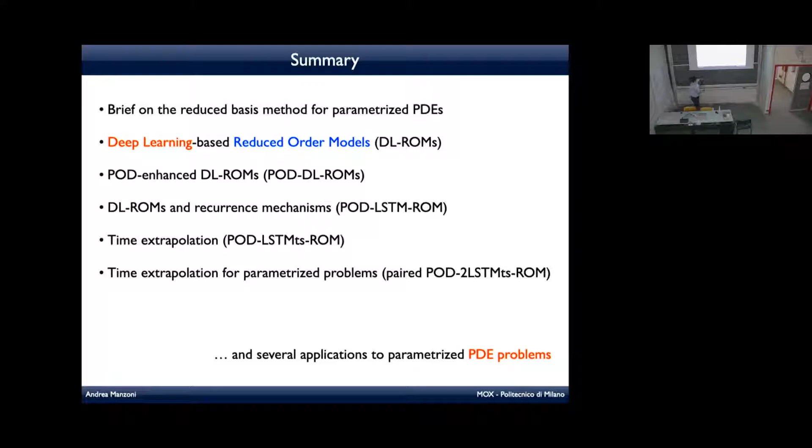Before starting, some acknowledgements to the main drivers of what I'm going to talk about. Stefania, who got her PhD at MOX, and then she's working with me during her postdoc. Nicola, currently PhD student. Federico has just finished his master project. Giorgio has just finished his PhD at the Civil Engineering Department. Stefano is a researcher at MOX in numerical analysis, and then more senior people here. Some of you, I guess, know already. Luca, associate professor, and Paolo, full professor. Attilio is full professor of Scienza delle Costruzioni, so mechanical engineering, and then Alfio.

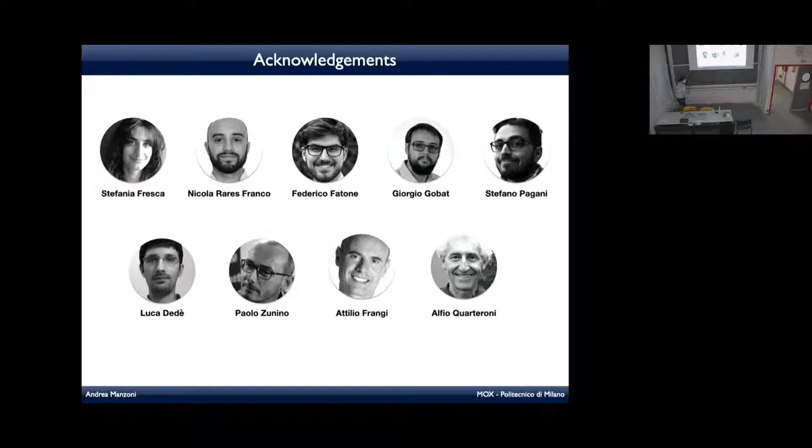Part of this activity was also related to an ongoing project within the framework of the iHEART ERC project coordinated by Alfio Quarteroni at MOX. Now, if you go clockwise, this is a bit the trip we had in the past couple of years. We started by considering cardiac electrophysiology. We moved to structural mechanics, macro, I would say, and then we moved to micro electromechanical systems, and then we approached fluids. I don't have time to go into details about all these applications.

I would like just to tell you the way we have approached these kinds of problems by realizing that previous techniques like reduced basis methods were not sufficiently efficient in order to reach real-time solution. We want to solve these problems many times because there are parameters that affect those problems. We want to solve them many times because, for instance, in the first case, some electrical conductivities are related with the patient, and then the behavior of the electrical potential on the ventricle can be

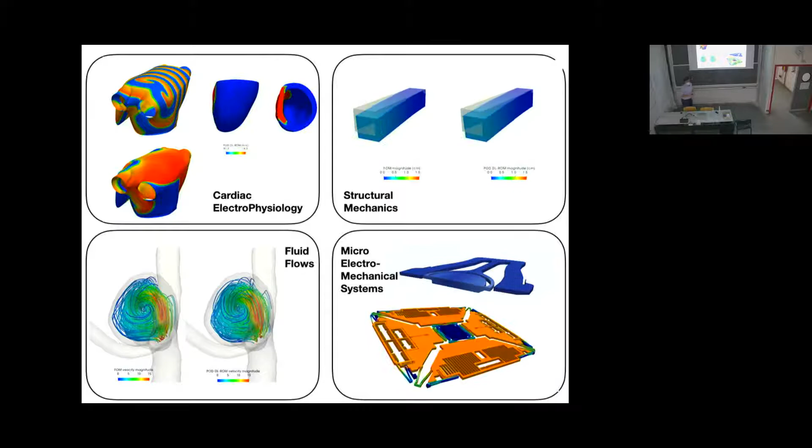affected by those parameters. We want to, for instance, consider the flow through an aneurysm regarding the impact of the Reynolds number on the vortex pattern that develops within the aneurysm, and so on. So we want to solve problems many times. These are multi-query problems. On top of this, there are other problems of great interest: uncertainty quantification problems, inverse problems, optimal control problems.

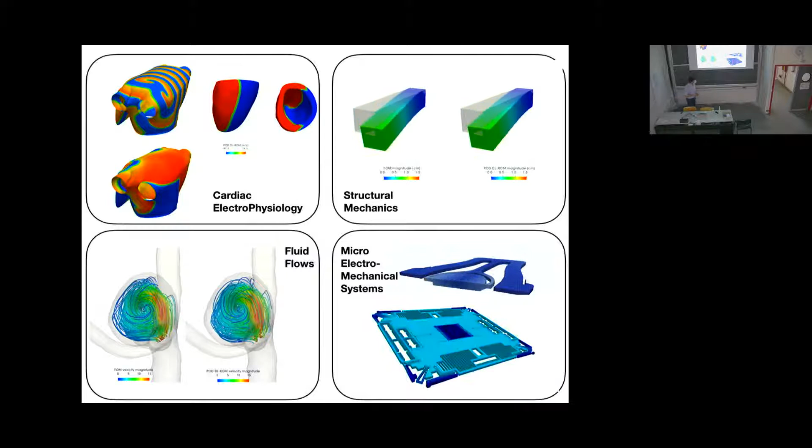So as soon as you need to solve a PDE many times, either because of inputs that vary, or because you are interested in addressing real-time computations, then sooner or later you realize that traditional high-fidelity full-order models like the finite element method are not rapid enough.

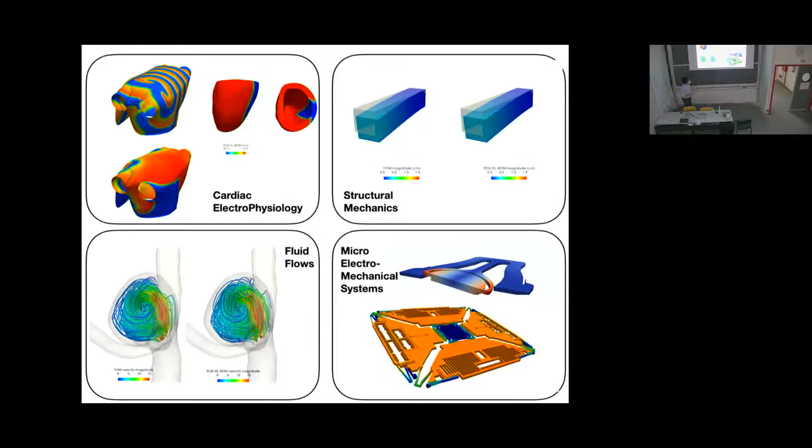There's plenty of contributions within this area. So depending on whether you consider physics-based strategies or more data-driven techniques, I guess you are already familiar with some of the words that appear on the slides. You can rely on purely data-driven machine learning emulators or physics-informed neural networks, or, on the left part, more physics-based approaches like the reduced basis method, and then something in between.

Since we started with the ideas stemming from the reduced basis methods, but we also relied on neural networks, I decided to sketch these sort of slides. Then depending on the way you train your model, you can of course reach different alternatives.

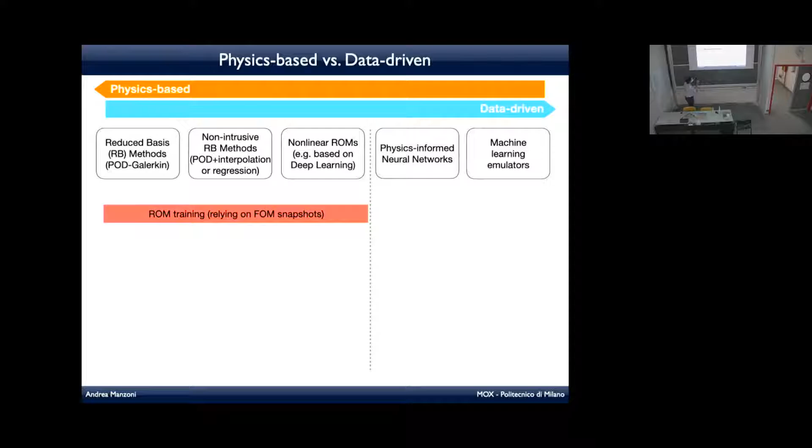In all these cases, if you consider more traditional strategies, and I'm going to spend a few minutes on this, we need to train the reduced order model by using some snapshots, that is to say, some solutions that I need to compute by relying on the full order model, the FOM. So I cannot replace the finite element approximation. I build something upon it. Okay? So I still rely on the full order model to generate data, either to train a traditional linear reduced order model or a nonlinear ROM based, for instance, on deep learning.

Either I rely on low-dimensional linear subspaces, then I fall onto the more traditional reduced basis methods, or, as in the case I'm going to address, we want to rely on nonlinear reduced manifolds. We want to compress, to reduce the dimensionality of our data that stem from the numerical approximation of PDEs by using deep learning.

And then, depending on what you would like to do during the testing stage, so each time you have a new parameter value and you want to solve the PDE once more, either you build a reduced system in the reduced coordinates that is linear or nonlinear, depending on the problem you started from, or you evaluate a neural network-based map that has been trained. In this way, we can reach very fast computational time during the testing stage.

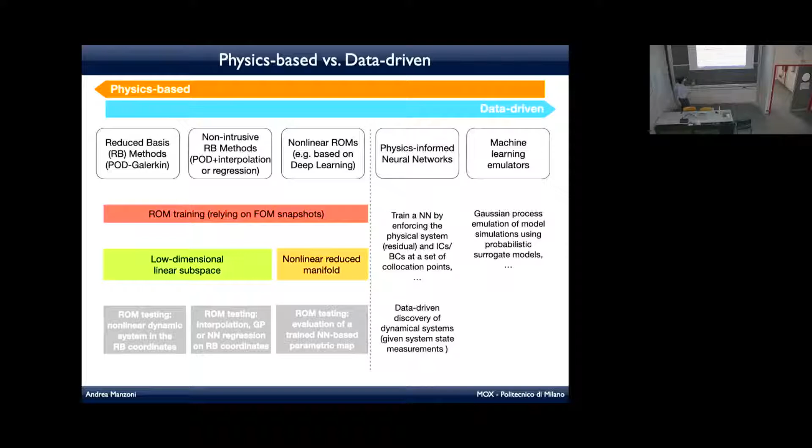Or you can do several other things. You can rely on Gaussian processes, or use neural networks to enforce the equations of the problem, and so on. So we will focus on the left part, and in particular, a sort of intro to the basic strategies that we started from in order to then approach nonlinear reduced order models.

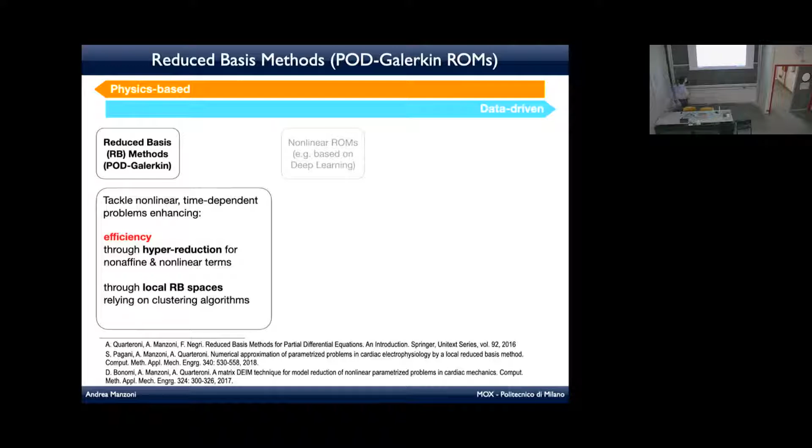So the very first set of slides is devoted to the reduced basis method, in particular relying on the proper orthogonal decomposition, POD, something that can be called either singular value decomposition or principal component analysis, or Karhunen-Loève expansion if you are more related with stochastic problems. We need to enhance efficiency in this case. In reality, some machine learning strategies already appear here because we rely on clustering algorithms to be able to perform a local reduction.

A linear problem to warm up. Sooner or later, if you rely on finite elements or finite volumes and you have a linear, stationary partial differential equation, you end up with a linear system to solve. N_h is the dimension of the linear system. N_h can be very large, depending on the discretization you have chosen. And this is the most basic version of the problem we need to solve.

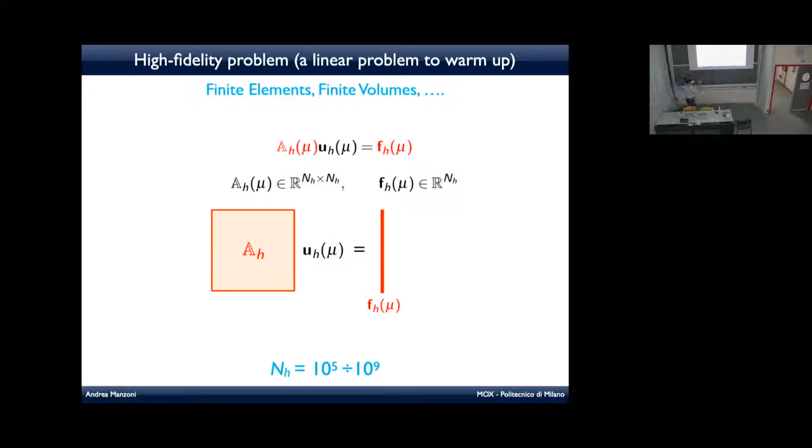For any mu values, where mu is a vector of parameters, a finite dimensional set of parameters that can affect either the matrix at the left-hand side or the source term, the boundary conditions, whatever, you have to face the solution of a linear system like this one. The idea of the reduced basis method is essentially to sample the solution manifold.

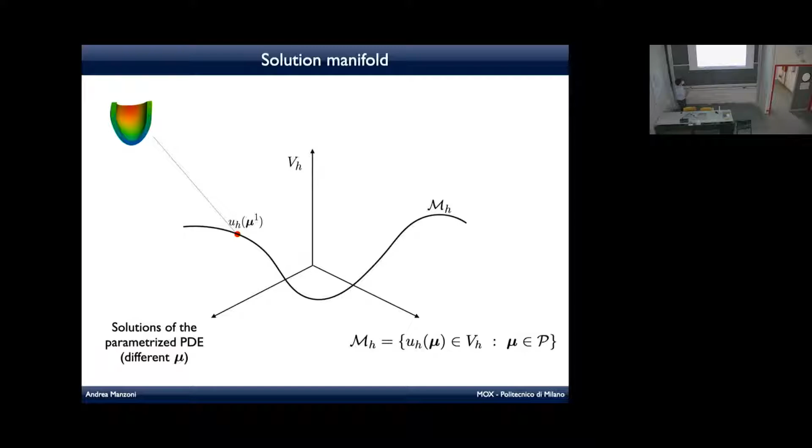Within the finite dimensional space V_h in which we seek the solution of the full order model, a finite element space for instance, the parametric dependence induces a structure on the solution set. So instead of looking for a set within this space, you might think that the parametric dependence yields a better structure to the solution set, the solution manifold. If the parameter is one-dimensional, you have this sort of filament in the space. Each point here is the solution of a problem.

So the idea of the reduced basis method, which in part is also inherited by the deep learning-based ROMs, is to sample offline this manifold. This means that for each parameter value sampled on the manifold, I compute the solution by using the full order model. So finite element computations are still behind this picture. And this is the offline, the training stage, okay? Even before considering neural networks.

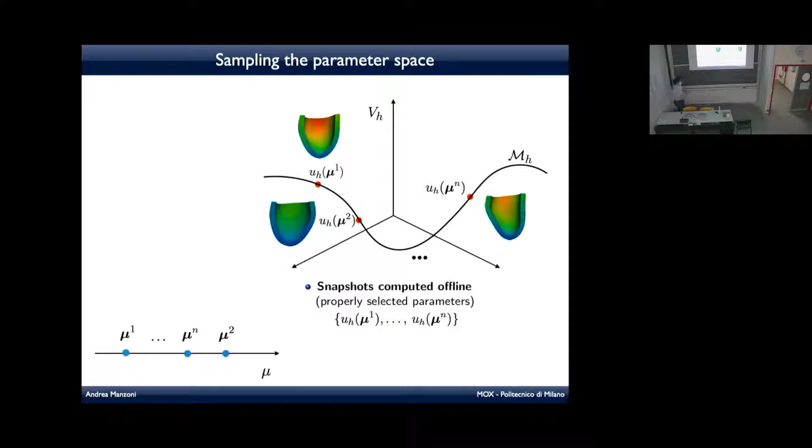Then, the interesting part is what happens if a new parameter value mu, different from the ones that I have visited offline, comes, and I want to solve the problem for the new mu. What happens?

Well, instead of looking for an approximation on the black manifold, I'm going to look for the solution on the red manifold that lies on the hyperplane in blue, that is spanned by a set of small n, that will be large N in the following slide. The red manifold lies in this low-dimensional space. This is the case in which you have a linear low-dimensional subspace with a dimension that is hopefully very small.

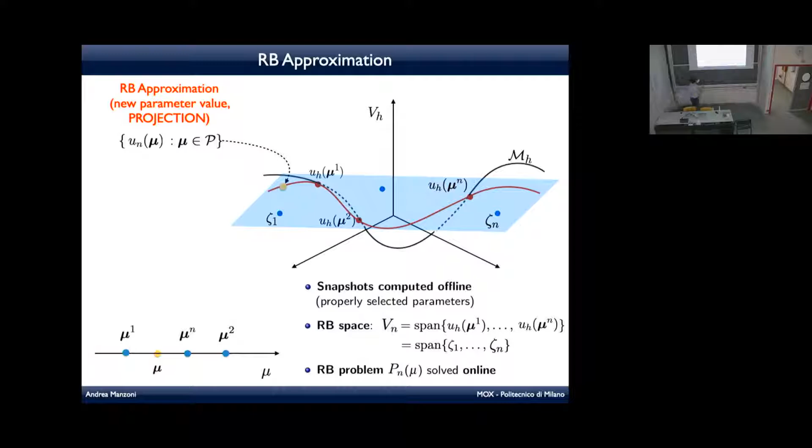NH was the dimension of the previous discretization, the full order model. I hope that this dimension n is much smaller than NH. Otherwise I cannot hope for a good speed up. And then I need to enforce a set of n constraints. I have a linear combination of n basis functions. I need to enforce n equations. And this is the idea.

So I'm looking for an approximation. Sorry if I am a totally discrete guy in the sense that everything has been already discretized. So I find much more intuitive to look at the algebraic counterpart of all the formulations, to be faster also, and I hope simpler. So the original finite element solution is approximated by a linear combination of a set of basis functions. V is a matrix that allows me to change the basis between the full order and the reduced order space. And now I need to find n components.

This will be the vector. So instead of looking for a vector that lives in R to the power NH, now I'm looking for a vector that lives in R to the power n. Okay? How to do that? Well, I can enforce that the residual of the equation, what I get if I replace the original solution with the approximation, is orthogonal to the n columns that span the low-dimensional subspace. I need n constraints. I have n basis functions. This is a possible way. This is nothing but a Galerkin projection.

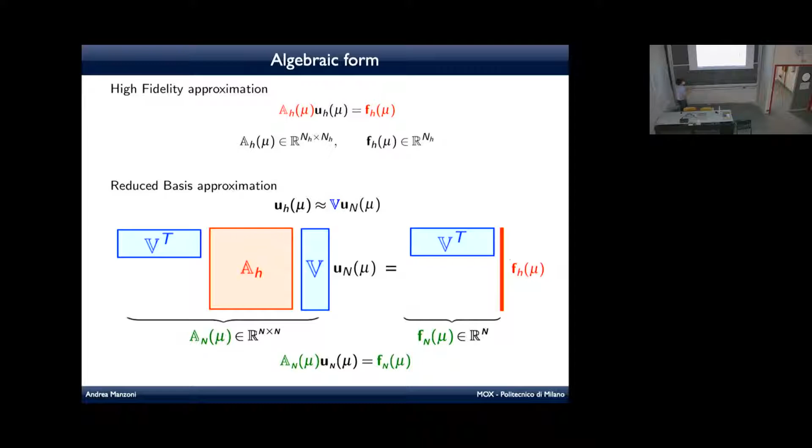And this brings me to a system that is much similar to the original one. The difference is that now the dimension n is much smaller than NH, because n is the number of the basis functions I have. This is the way I can get the new matrix and the new vector. The point is that I don't want to assemble this matrix in this way, because this would still entail the need to perform NH-dimensional computations. But if NH is 1 million, I don't want, for any mu value online, to deal with a 1 million by 1 million matrix vector product. Okay, so I need to be even more clever in order to assemble it. But this is, in 3 slides, the philosophy, the idea of the reduced basis method.

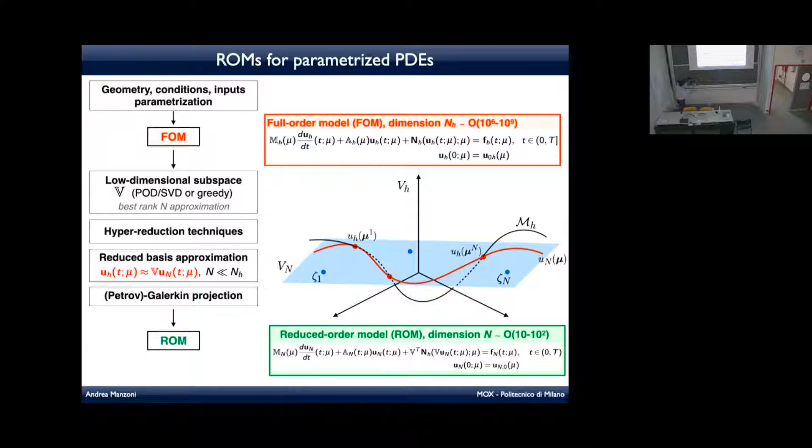Okay, and then this is the assumption we have made before. The solution is the linear combination of a set of basis functions, also if the problem is time dependent, and then a projection approach allows me to get a ROM. Also in the unsteady nonlinear case, the ROM looks very similar to the FOM. The structure is the same. All those matrices, Mn, An, are obtainable by that matrix product as before. And this nonlinear term deserves a bit more careful treatment. If you are interested in this, I can give you pointers and details.

What happens for a problem in cardiac electrophysiology? Well, this is a problem in which an unsteady reaction-diffusion partial differential equation has to be solved. This is a portion of the tissue. This is a very idealized case. And here there are three parameters. This is the so-called pinwheel experiment. Because you have a planar wave excitation of the tissue, the propagation of these fronts is typical of this kind of nonlinear reaction mechanism. And then you have a second stimulus. Depending on the way this second stimulus is given, you can play with three parameters: the time interval between the two stimuli, the radius of the region that you are going to stimulate, or the properties of the tissue. Well, the behavior can be completely different.

Okay, you may think that for each vector of parameters in this space in 3 dimensions, you can jump on the different solutions. What I want to do is to observe some of these solutions for selected parameter values during the training stage, compute the solution, put everything into a matrix, compute the SVD of that matrix, and then produce a basis.

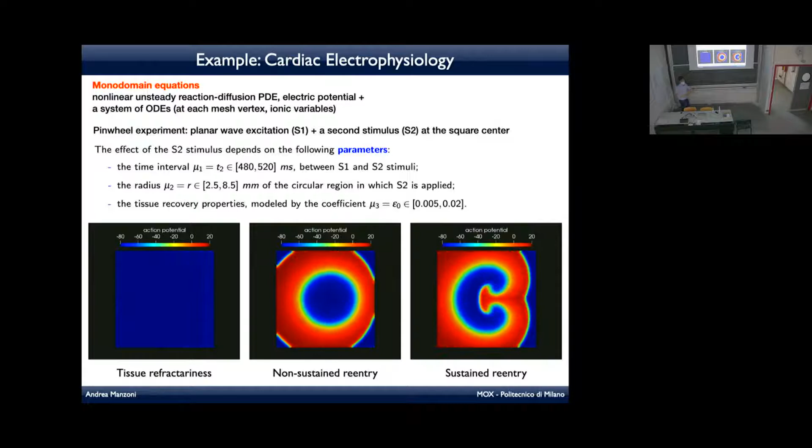This is the basis that I'm going to use instead of the typical finite element basis to generate all the new solutions for the unseen parameter values. Okay, which is the problem? Well, the reduced basis method works, but the point is that the singular value decay is very slow. This means that if I want to reach some precision, and the error that I get, at least on the training data, is related to the singular values that I discard, if I want to get sufficient accuracy, the dimension of the reduced basis space can be very large.

This means that 600 bases are needed if I want to get a sufficiently good reduced order model. These are solutions with a ROM sufficiently fine with respect to the FOM. The point is that the reduced basis dimension can be very large, not only because of the need of generating solutions as linear combination, but also on the right-hand side for the sake of hyperreduction. Somehow I need to linearize the nonlinear operator as well if I want to be efficient in their assembling. And also in this case, many terms are needed if I want to be sufficiently accurate in the interpolation of those terms.

So the method works even if I am using local reduced basis. I cluster the snapshots into 6 clusters, and this allows me to decrease a bit. Instead of taking 600, I have 200 basis functions, but this is still too much. Because this means that for any new problem, I need to solve a dynamical system of dimension 200. And at each step, I need to perform operations that are still related with a dimension that is order of 10 to the power 3 because of the assembling of the reduced operators. And this is too much. I'm not able to be real time.

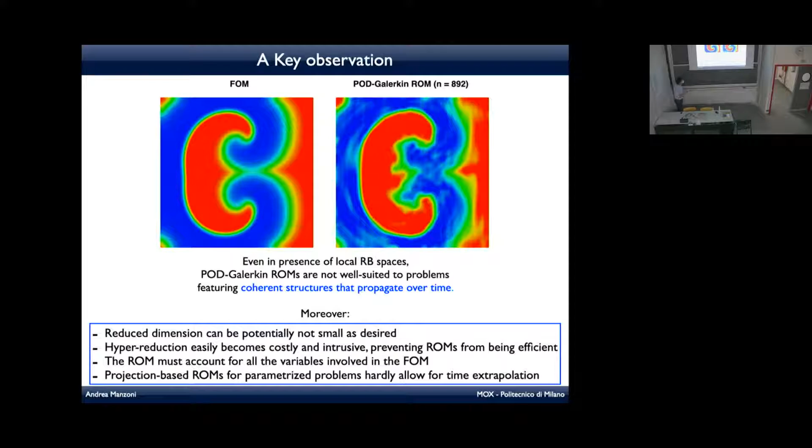These are some limitations, and these are the motivations, at least the first three, that motivated us to find alternative ways, and in particular deep learning based ROMs. The idea now is to solve still parameterized problems, enhancing efficiency by using deep learning algorithms that are trained on a set of full order model solutions.

So this means that some of the ideas that we had before are still valid. In particular, we still rely on data coming from the full order model. We still need to solve the full order model for selected parameter values to collect data. But the way we handle those data is completely different. I'm no longer interested in finding a good matrix to represent the change of basis. I'm more interested in looking for a nonlinear map that allows me to reduce dimensionality. Okay.

So in a couple of slides. Before, what we were looking for was a linear transformation from the full order model world, the finite element approximation, into the reduced one. So small n, which is the small dimension in which we were solving the problem before, was obtained by assuming the solution in the POD case, the proper orthogonal decomposition. For this reason I call it a linear ROM, because this is a linear transformation.

This is a matrix. The trial manifold, the set of all possible solutions for different times and different parameters, was generated once I had an idea of how those reduced coordinates evolve in time. So you have n degrees of freedom, and we had a map that was linear. The map that from the reduced world allowed me to reconstruct the full order solution was linear, a matrix vector product.

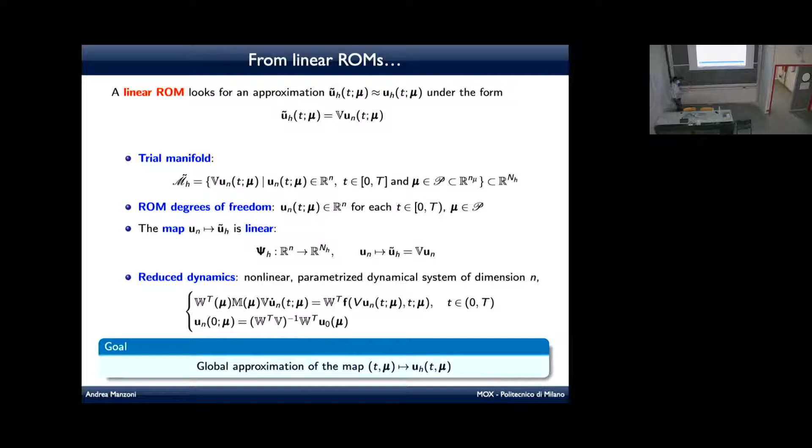What happens in nonlinear ROMs? Well, I have some maps. Then in a couple of slides, I try to make this, I hope, much clearer and built step by step. So now I have a map that allows me to obtain the full order solution coming from the reduced one. This is no longer a matrix. Before here I had a matrix. Okay, this is a nonlinear map.

Once I have the reduced degrees of freedom, then by applying this map to the reduced degrees of freedom, I get what is the trial manifold. So the set of all possible solutions for parameter values and times. Okay, so I have a set of small n reduced order degrees of freedom and another map to learn. This is a nonlinear map, no longer a matrix.

I need to learn this map, but I have two maps because I cannot rely yet on that projection process. So I need a second parameter dependent map to be learned. That is what happens for the reduced degrees of freedom. Okay, I need to compress information. I need to find a suitable space of latent variables in which to solve the new problem. Okay, how to do that?

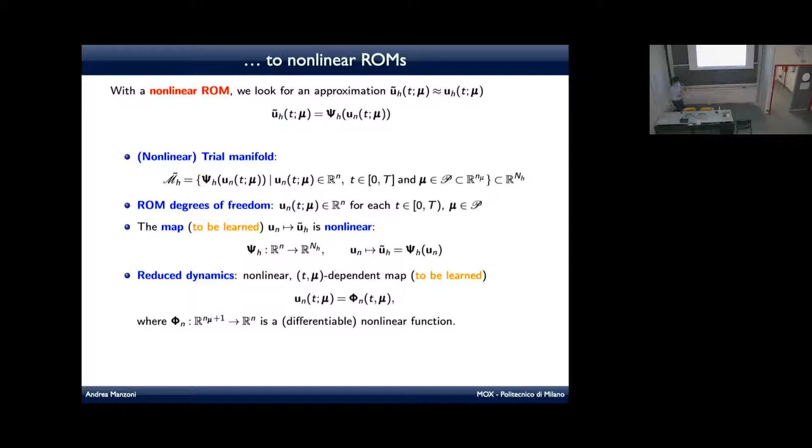Remember that I want to solve a problem for any new parameter value. So I need a second map that for parameters and time allows me to get a suitable approximation of the low dimensional representation. So by training this autoencoder, at the very end, for the testing stage, I will discard the encoder, and I will compose a feed-forward neural network that allows me to learn the map from the parameters to this latent representation, composed with the decoder, to get an approximation UH tilde of the initial solution.

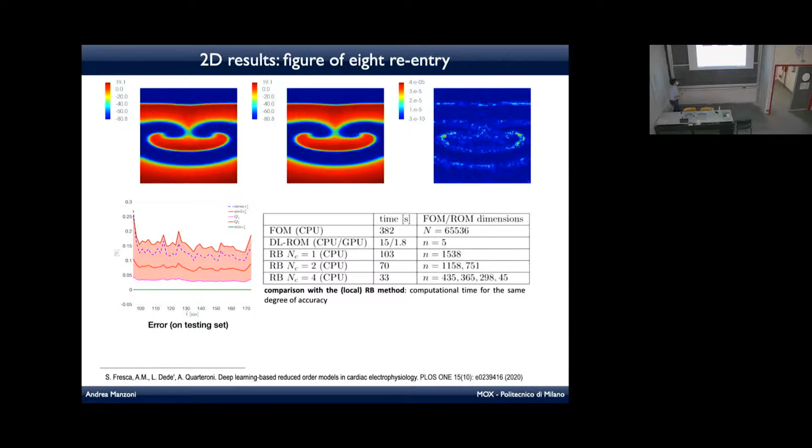So I guess that some questions start to arise. The first question is how to choose the reduced dimension n, that is, the amount of latent coordinates that we use in the case of a DL-ROM. And then many other questions: how to design the architectures, how can I expect the error to decay, and so on. I don't have time to address all those questions, but at least I have inserted 3 slides trying to address this question, also knowing the interest that some of you have in this field.

We move to the steady case, and we move to the case in which we have an autoencoder, so psi prime and psi, the encoder and the decoder, and phi now is the parameter to latent representation map. So the reduced order model is the composition of these two maps, the blue one and the green one. The encoder will be discarded.

And what we have shown, at least for linear elliptic PDEs with a certain degree of regularity in the parameter to solution map, is that we can somehow bound this dimension, the minimum dimension n min, as a function of the number of parameters. So P is the dimension of the parameter vector that was of finite dimension before.

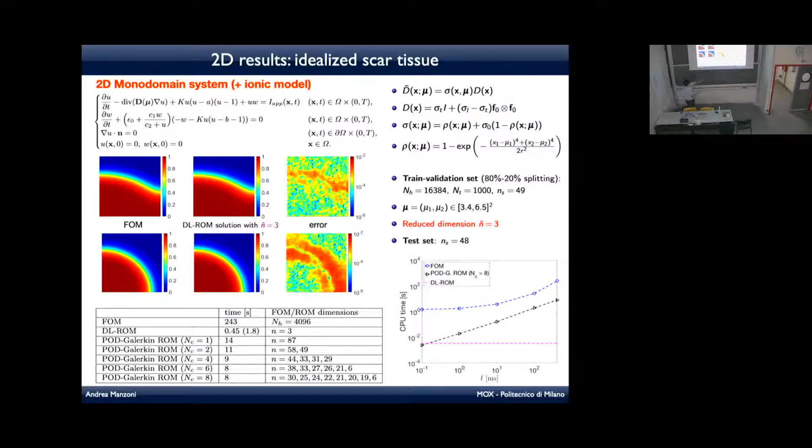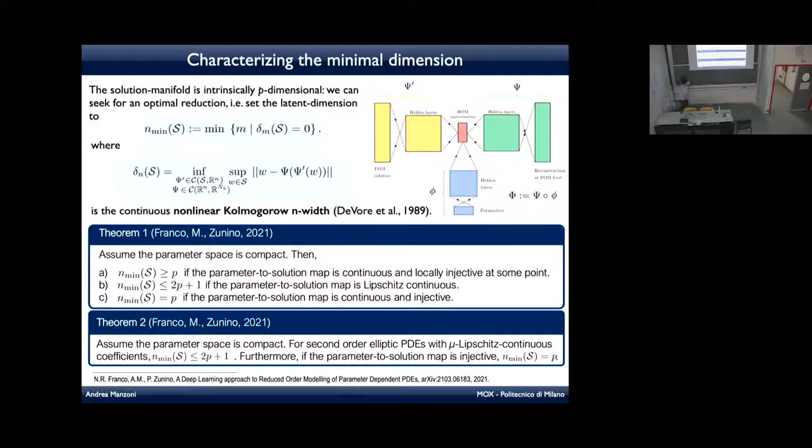At the beginning, a couple of years ago, we could not rely on rigorous results. Later came the analysis on this, for the time being, stationary version. If the parameter space is compact and you are facing second order elliptic PDEs and the coefficients in the PDEs are at least mu-Lipschitz, well, 2P plus 1 is the maximum that you can play with. And if, moreover, you have a parameter to solution map that is injective, well, P is the dimension to play with. And if you're interested in the details, we have an arXiv preprint for a paper that is currently under review on this.

There's something more. Can we bound the error? So the approximation error that is committed by this deep learning-based ROM over the parameter space, I can consider it as the supremum of the solution minus the reduced order solution. I can bound this by putting together 2 different contributions. This is a sort of reconstruction error.

U mu is the ground truth solution. This is the only action of the autoencoder, psi prime and psi were the encoder and the decoder, plus the parametric error. This is the error between the output of the small phi map and the encoded version of the solution. And surprisingly, the linear Kolmogorov n-width comes into play again.

We can bound the model complexity, somehow, how many weights and how many layers we need for the 2 networks, in terms of the accuracy epsilon that we want to reach on the global error. And M is somehow related to the minimum dimension that is required to have the linear Kolmogorov n-width. So this somehow shows a sort of reminiscence of what happened in the case of linear ROMs, in the case in which linear ROMs, say, proper orthogonal decomposition, were fine.

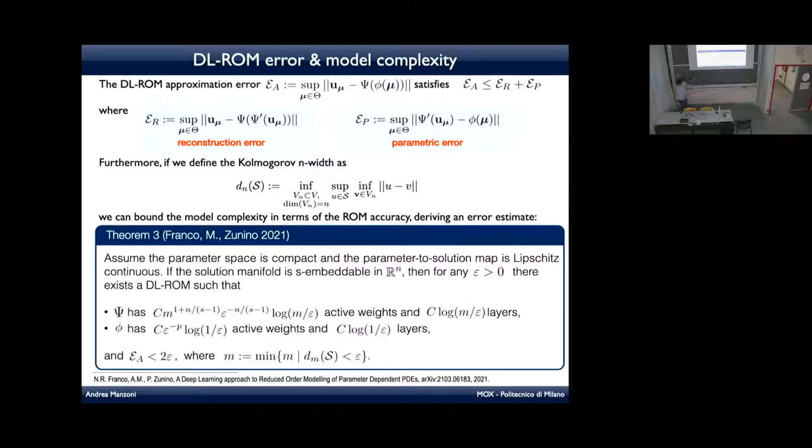Also here, we can hope for a very good reduction. So problems for which linear ROMs were causing much more trouble will somehow reflect also in the complexity of the networks. If you're interested in the proofs and further details, everything will very soon be added to arXiv, because this is part of the revision process of this work.

Comments. So this M, the minimum value for which the linear Kolmogorov n-width is smaller than epsilon, can be thought of as an equivalent linear dimension. So this accuracy is roughly equivalent to the optimal one that can be achieved via projections. Okay, so M can be thought of as the number of modes in the previous reduced basis approach.

Okay, M does not affect the latent dimension. The latent dimension is related to P, the number of parameters. M has an impact on the complexity of the networks. Okay, and the slower this Kolmogorov width decays, the more degrees of freedom in the neural network architectures will be required, and the higher the number of the training snapshots.

And on the other hand, if the linear width decays mildly, somehow a mix of linear and nonlinear reduction might be an interesting choice. This was a conclusion that we saw theoretically. One year later, we already tried it practically. In the following slides, these are the results.

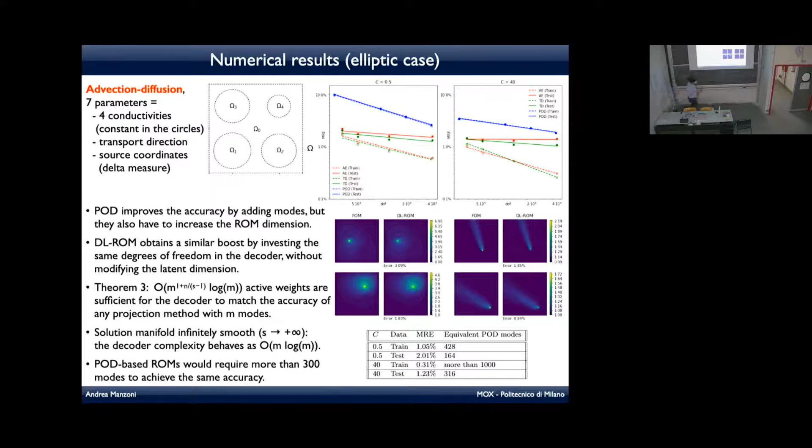This is an advection-diffusion problem with 7 parameters: 4 conductivities in those 4 regions, so constant conductivities in the circle, but parameterized; the transport direction, the angle; and the coordinates of a delta source that can move around the domain but not too close to the boundary. These are the 7 parameters.

And here you have, in terms of relative error, the comparison between the POD in blue and the training, the dotted line, and the testing errors with, for instance, this autoencoder idea in red. POD allows us to improve the accuracy, but of course requires more and more degrees of freedom if you think of the POD matrix that needs to be larger and larger.

On the other hand, these DL-ROMs allow us to obtain a similar boost by putting more degrees of freedom into the decoder, but without modifying the latent dimension. The good news is that we can still play with a very small dimension that in this case is equal to 7. So at the very end, 7 is the reduced dimension, and not 428 or 300 as in the POD case to reach the same accuracy.

Somehow, if you want to put together a few ideas on these DL-ROMs: the dimension of this DL-ROM, in particular regarding this latent representation, can be kept extremely small. At least for some classes of problems, we can show that this can be related to the number of parameters of the problem, the number of components in the parameter vector.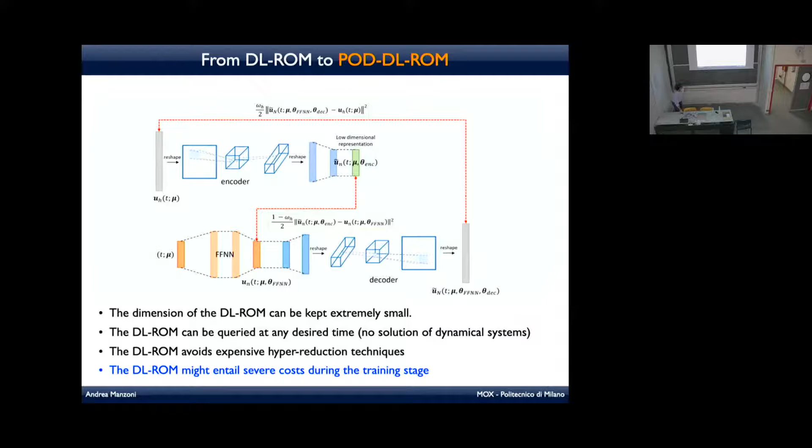Of course, I'm not going to cover all the slides because I'm going a bit slower. How much time do I still have? I don't. Okay.

So the idea is to move from DL-ROM to POD-DL-ROM, where POD is proper orthogonal decomposition. So POD-DL-ROMs add to DL-ROMs a first moderate dimensionality reduction based on POD. This means that from the original data I have, snapshots of the solution in time for parameter values, I will apply the idea of the convolutional autoencoder and of this feed-forward neural network to the projected version of this data.

So it's like the first layer of this convolutional autoencoder is already decided, and this is a linear dimensionality reduction. This means that at the very end, I will have a reconstruction error that is related to the projection of the data onto the POD space. And then as soon as I have recovered the approximation of this projection, by multiplying by the POD matrix, I will get the final solution.

So now I have another unknown: capital N is the dimension of the POD. This can be very large. The problem was that before, with the reduced basis methods, with the POD-Galerkin model, capital N was the only way to reduce the huge dimension N_h.

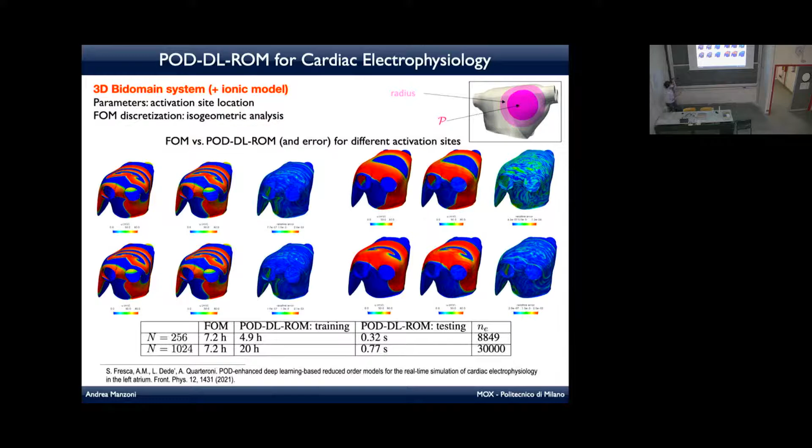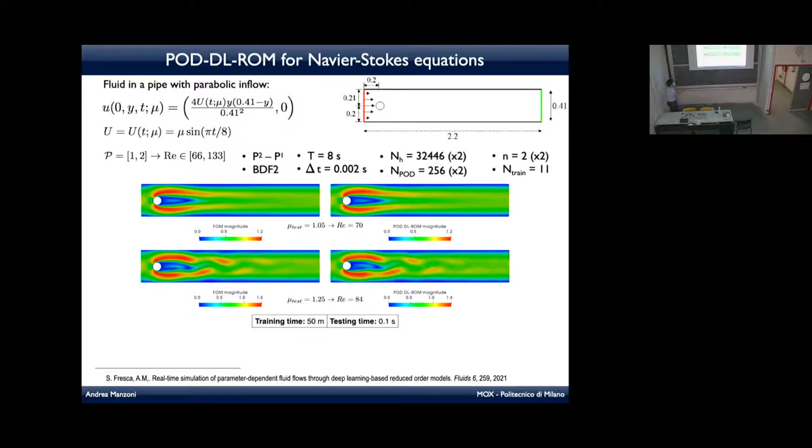Results from fluids: 0.1 seconds to get the solution for different Reynolds numbers in the typical flow past a cylinder benchmark, and also extended to velocity and pressure approximation. If you want also pressure, well, you can train networks that take into account also data coming from the new variable. So each variable can be approximated independently, because no physical constraints appear in the loss. This is a pro, but this could also be a con.

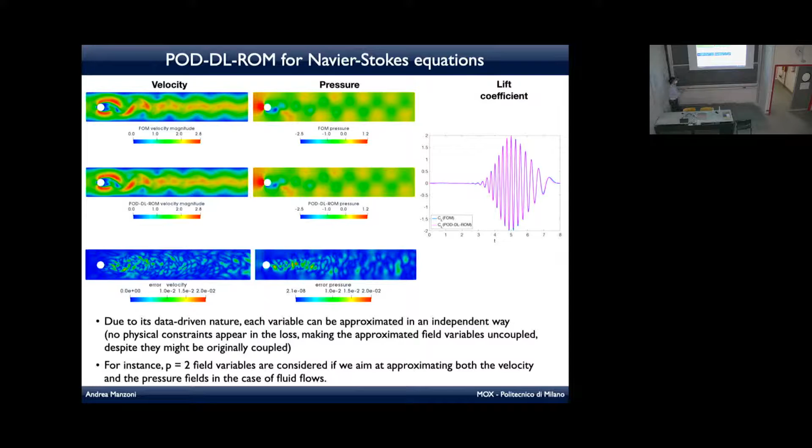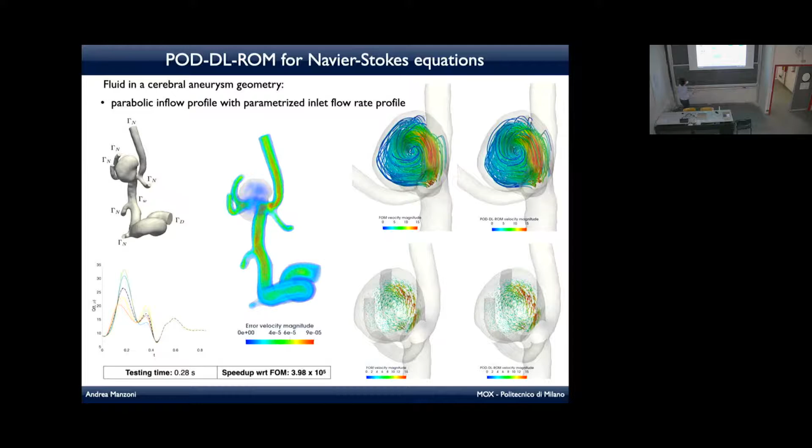All right, extension to fluid-structure interaction. There is also a paper on fluids if you're more interested in these applications. And then a few words regarding the way recurrency mechanisms can be added to POD DL-ROMs to take into account the temporal evolution. So for the time being, time was another parameter, not the time variable.

So adding structures that take into account recurrence mechanisms that resemble a time-marching numerical solver was the idea, to consider time as time, and in particular to try to advance the solution for larger times than the ones in which I observed the system during the training. So during testing, I want to solve the problem for new parameter values in the future with respect to the time horizon that I have seen during the training.

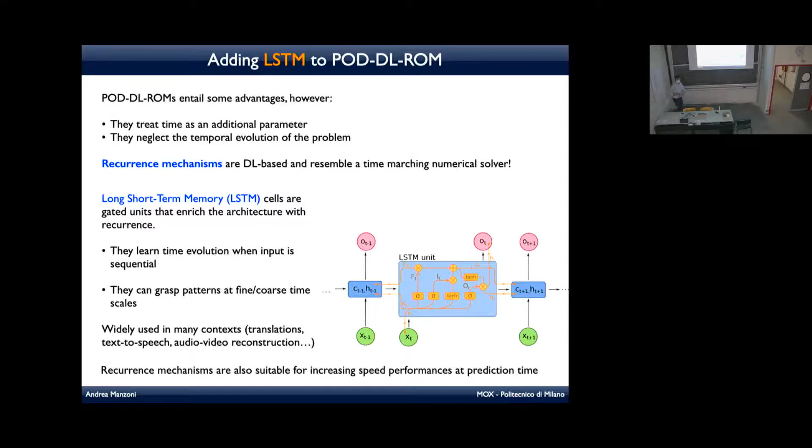This is the idea. The idea is to somehow replace layers with a sort of LSTM autoencoder to take into account a set of sequential inputs and provide a low-dimensional representation of the entire time sequence as a single vector. But this is just for parameters. And to treat time, I need to be a bit fast now.

I need to solve a sequence-to-sequence learning problem because I want to predict, to forecast the solution where I haven't computed the solution during the training for the snapshot evaluation. And another version, this T POD-LSTM-ROM, is the second architecture that is coupled to the previous one within a unique mu-T POD-LSTM-ROM that takes into account LSTM architectures.

I know I am very fast on this part, but if you are interested, there are contributions to a workshop at NeurIPS last December, and another paper that will appear very soon.

At the very end, you have a training set, and then you use this data to train two architectures. This is a two-step process that exploits LSTMs, because the first block predicts the solution for new parameters that were not seen before, and the T block takes that prediction and extends it forward in time. This allows us to predict what happens for the new parameter, and within a time series predictor, based on this prediction, we can further advance in time.

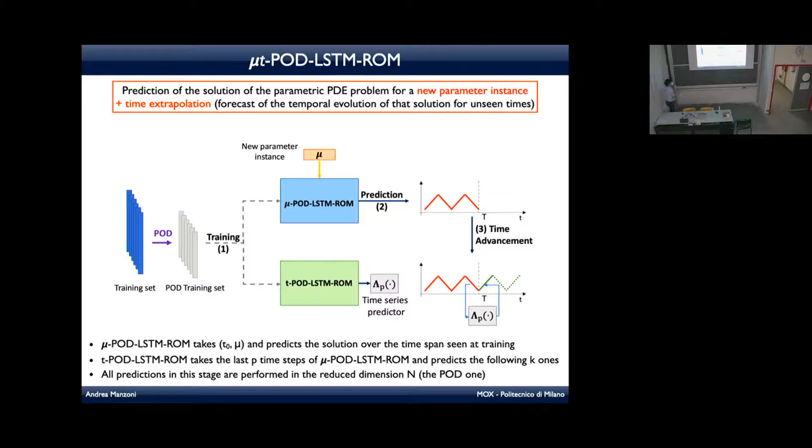And this is a quite powerful architecture to perform prediction for new parameter instances and time extrapolation at the same time. Don't have too much time.

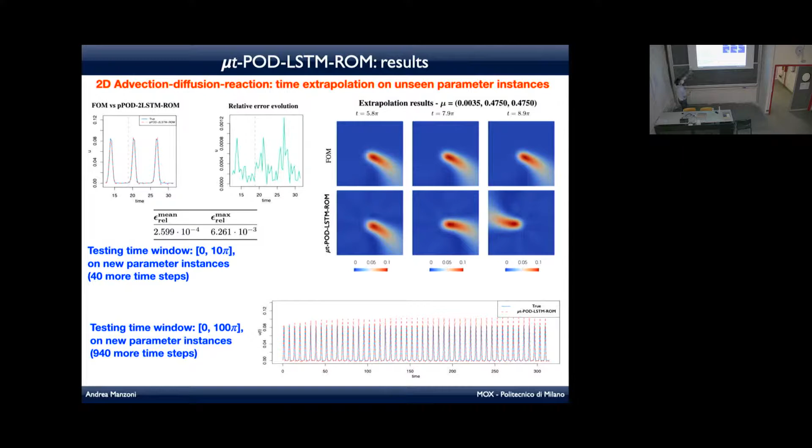This is, for instance, what happens in terms of testing on a new time window. So the gray was the training time period, and this is the prediction for a new parameter value against the true solution, the ground truth, and the error does not blow up in time. And even if you consider very long testing time windows for new parameter instances, you get nice results. This was a periodic case, but also for non-periodic behaviors.

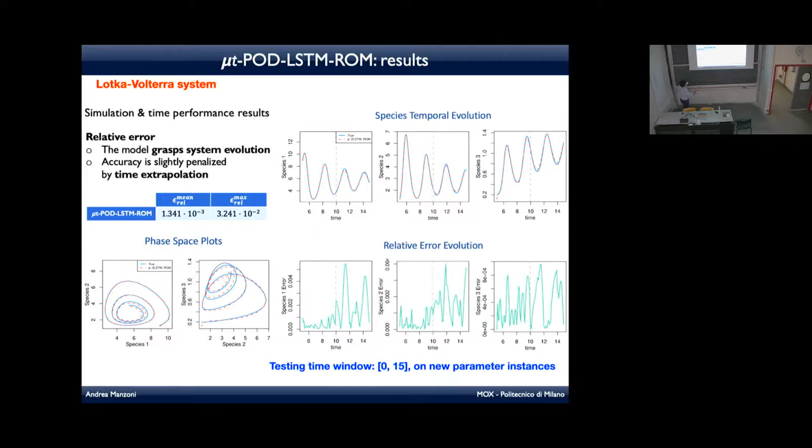So we started with a simpler case, a three-dimensional Lotka-Volterra system with a periodic behavior. In this case, of course, we avoid the former POD reduction because we already have a low-dimensional system. What happens if you want to predict forward in time till 15, if you stop the training at 10? Well, the prediction is very good.

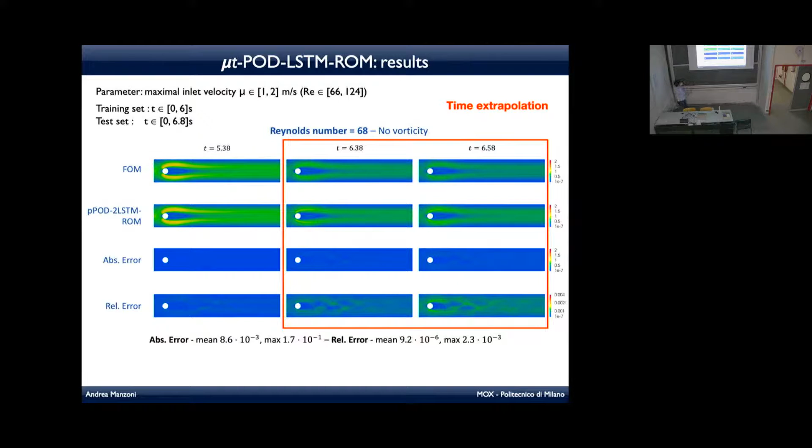And this allowed us to perform time extrapolation for the Navier-Stokes case as before, reaching 7 seconds if we observe till 6 seconds, so almost 1 further second. Of course, this is a much more involved case for different unseen values of the Reynolds number. I stop here. I don't have time to address applications in microelectromechanical systems, leaving some conclusions.

In particular, while the use of deep autoencoders is motivated by the need of encoding and decoding a high-fidelity approximation of the solution manifold, we provided a sort of theoretical framework to assess, at least for second-order linear elliptic PDEs, the complexity of the architectures and the minimum latent dimension. But I would also say that a linear dimensionality reduction through POD is still very useful, although a huge computational speed-up can be obtained only through deep learning-based nonlinear ROMs.

There are several open issues. This is just the beginning of the story, because except for this case of second-order linear elliptic PDEs, the theory has still to be written. So a lot of results need to be shown. First of all, we need to extend the theoretical results we had on the elliptic PDEs to the time-dependent case.

You might wonder if we could embed the physical constraints into the DL-ROM. So far, in the loss function, there are two contributions related to the reconstruction error and the discrepancy at the reduced level. We're currently working on this way of embedding physics in the DL-ROM setting.

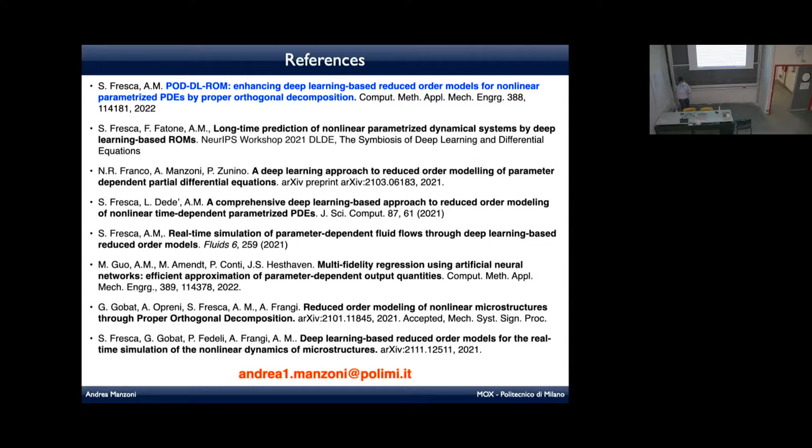Yeah, of course. Suppose that, for instance, I'm going to activate the tissue there, but for whatever reason, the clinical doctor is telling, well, could you understand what happens if you activate the tissue even a bit more to the left? Well, for sure, I will start from that network that I have trained already, and I will add a few more training data to take into account conditions that will allow me, I hope, to span over possible conditions also at the testing time.

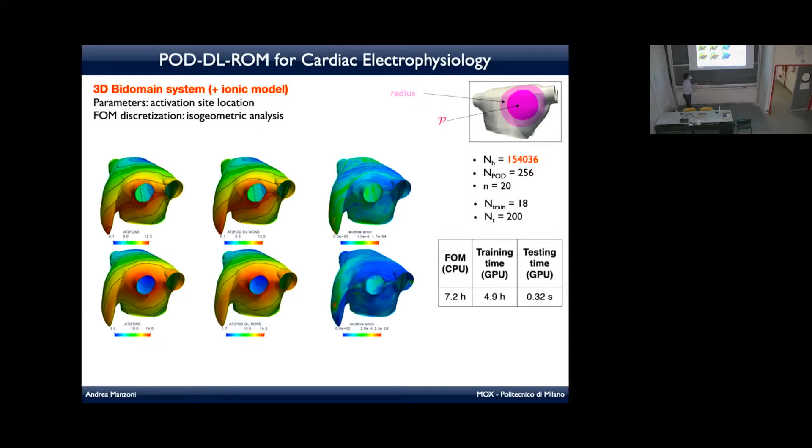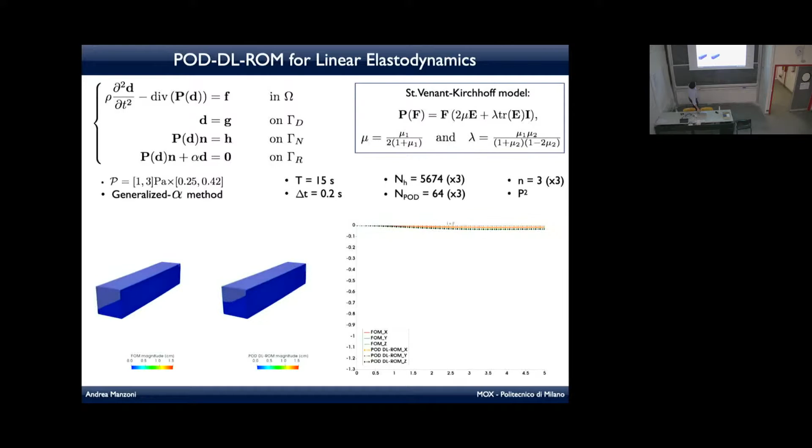The idea of pre-training was already present in this POD-DL-ROM. Here, for instance, you can start by considering a given model for the constitutive law of the material, and then I modified the law. So I started by training the networks by considering snapshots that maybe were much simpler to obtain, because running the first model with the first constitutive law was simpler than in the second case. Or, for instance, also the parameter space in this case changed. Yeah, because here I have now a parameter space that is a bit different or larger.

So we indeed started to train the final network from the point at which the previous training was stopped, by considering, for instance, new data or data coming from a new constitutive law or for a new parameter region. So somehow this idea of multiple training, or training in few steps, is already present. There are no results on these slides, but in the paper, yes, showing that indeed the effect of this pre-training is quite evident.

Then, of course, it depends. If the problem changed completely, and I need to span a completely different range of parameters or conditions, well, okay, I can always start from this, but if the scenarios I want to describe are totally different, maybe depending on the case, it's better to start from scratch. I don't know.

Of course. Yep. Yep.